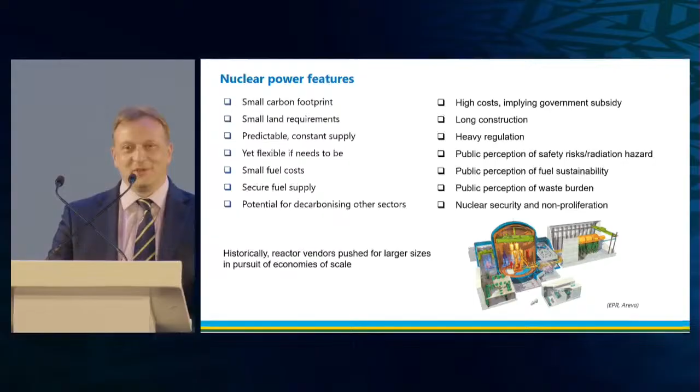However, everyone was waiting for the however, it does have challenges. So arguably the biggest challenge of nuclear power is costs, of course. So this is where small modular reactors are coming in. Long construction times as a corollary of this. Heavy regulations have been mentioned. Despite the actual small cost of fuel and waste management, the public thinks it's very dangerous and the fuel is limited and very hard to manage.

So traditionally, reactors were built to be larger and larger in pursuit of an economy of scale. So let's explore that concept a little bit. So what you see here is a marvel of engineering. This is a French/German design called EPR, which we're building in the UK at Hinkley Point C and hopefully soon at Sizewell.

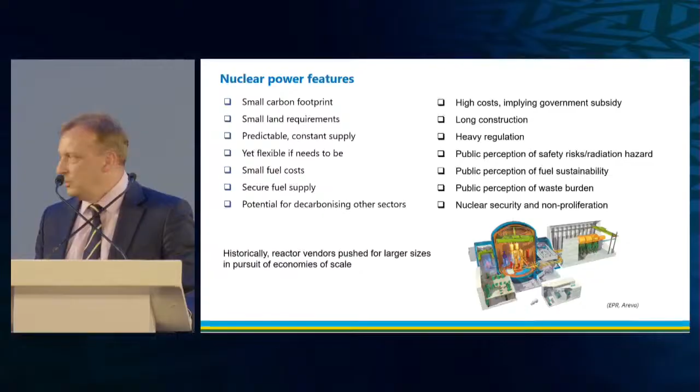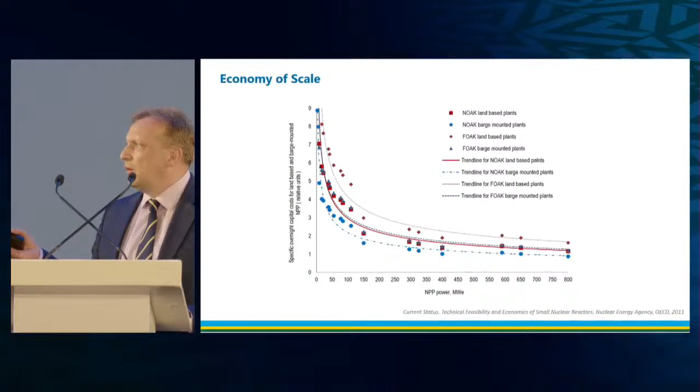Another thing I want you to note is that this curve is non-linear, so it kind of takes off at really small power sizes. So why would we contemplate smaller reactors and hope that they will be any cheaper? So let's explore that a little bit.

One of the things that have been talked about previously is a shocking realization that costs of nuclear, because they are mostly costs of capital, hugely depend on financing. So this is Hinkley Point C, but for other large reactors in the West you can have similar observations. So the green piece of the pie is the interest on your loan or servicing the debt for the construction, which tells you one of the most straightforward ways of reducing the cost of nuclear is to have more creative financing with or without government support.

Another observation which was also voiced is the fact that the cost of hardware, all the equipment and pipes and valves and pumps and heat exchangers, or the reactor pressure vessel and so forth, is relatively small. They're roughly a quarter of total costs. So where are those costs, and why do they vary so much across the world?

So two particular colors I want you to note here. One is productivity of labor in on-site construction, and another one is so-called indirect costs. Another way of saying this is bureaucracy or administrative burden: some people do the welding and concrete pouring, but 5 people are standing nearby and checking that this is done appropriately. Is this the most optimal way of doing this? I don't know. There are obviously other success stories.

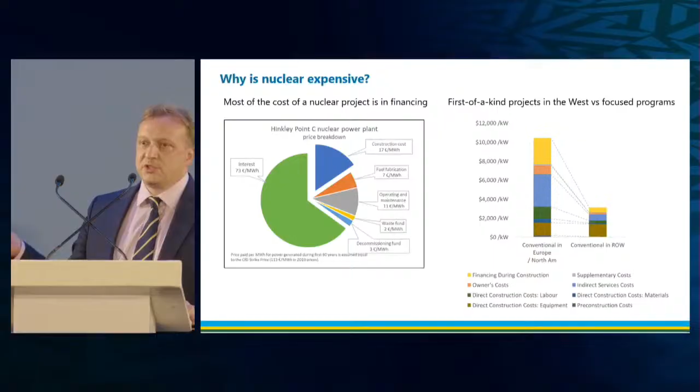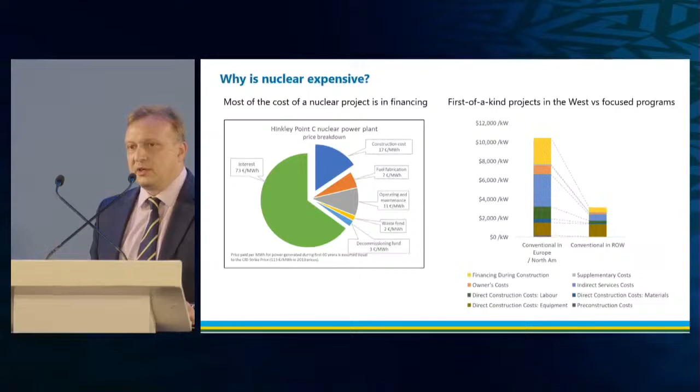What you see here is a comparison of nuclear costs in North America and Europe versus the rest of the world, with no cutting corners here. These are the same technologies being compared. So bureaucracy and cost of capital are the two obvious things to watch. And because you need to borrow so much money for so long, why don't we try to borrow less money for a smaller project that gives you returns sooner? So that makes your interest payments smaller.

So I thought the small modular reactors idea goes back to sort of the early 2000s. This is produced by Westinghouse in the US. This curve, again, the familiar economy of scale, but I dug a bit deeper and discovered this paper from the 1980s, published in the Journal of the British Nuclear Energy Society, which argues the exact same thing.

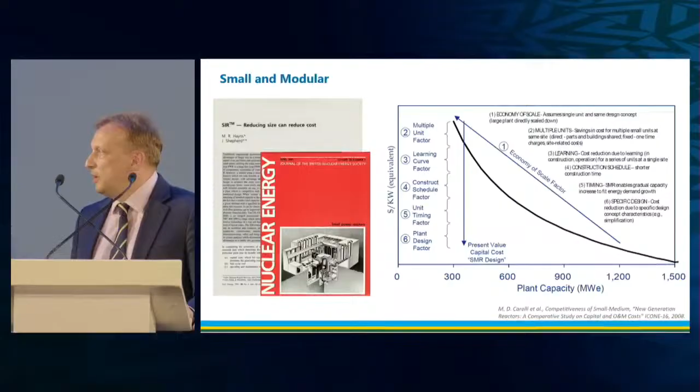So by going smaller, there's less money to borrow, there's higher certainty for project development, but also an opportunity to move expensive labor on site to cheaper labor in factories where you have better control, more opportunities for learning and more opportunities for standardization and quality control. So all these ideas have been around for a while, and now we, as the global nuclear industry, are trying to take advantage of those.

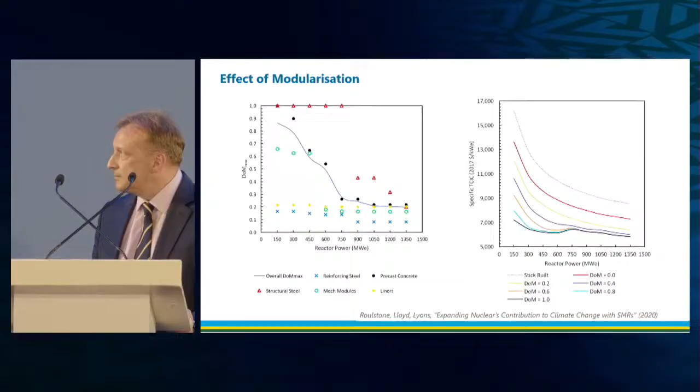So one of the key things in that pursuit is how modularizable the designs are. So the absolutely key thing is the so-called degree of modularization. The more of the power plant components you can move from the expensive site to the cheap factory, the better. And it turns out the smaller the size, the larger the degree of modularization that you can achieve. So as you can see here, the larger that degree, the lower the curve of economy of scale becomes, and at some point it becomes nearly flat. So your cost of nuclear construction becomes sort of insensitive to the size of the power plant.

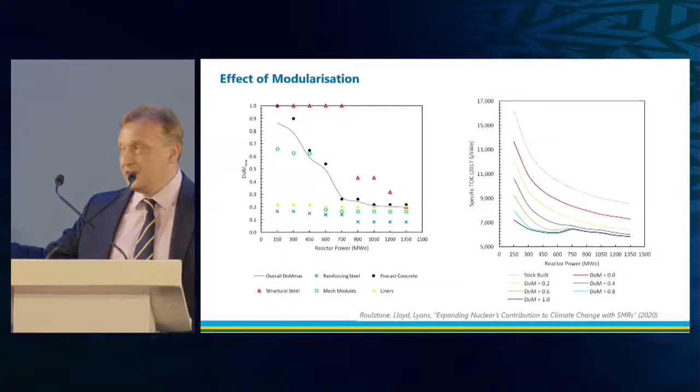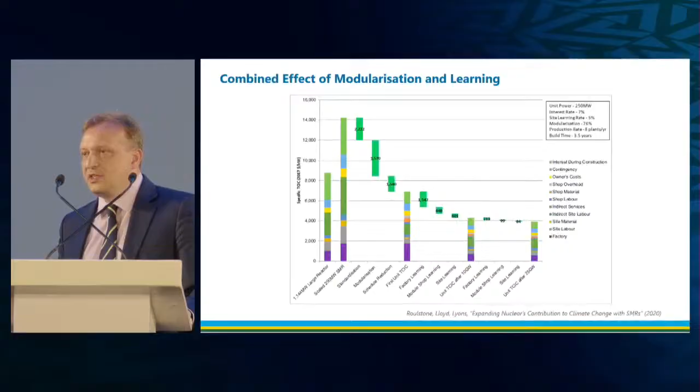However, exploiting these opportunities for modularization, learning, standardization, not just of manufacturing processes but also regulatory processes, as has been said before, you can reduce the cost to something that is actually even smaller than the large reactor, but inaccessible if you build something like an EPR, which is sort of the standard way of doing things, at least in the West.

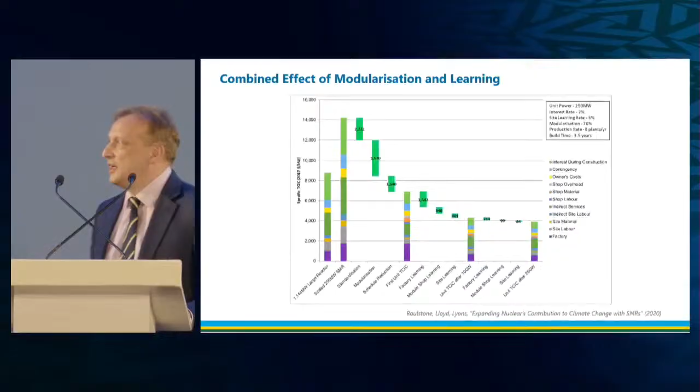So I want to leave you with a few key messages here. First of all, SMRs as an economic proposition are a very attractive concept, and I'm very excited about this, and I think we all should be.

Let's make a good example here in Africa pursuing this. So as I said, modularization is the key. It can be cost competitive with large light water reactors, but it will require a very highly optimized supply chain, which enables learning and economy of mass production to compensate for negative economy of scale.

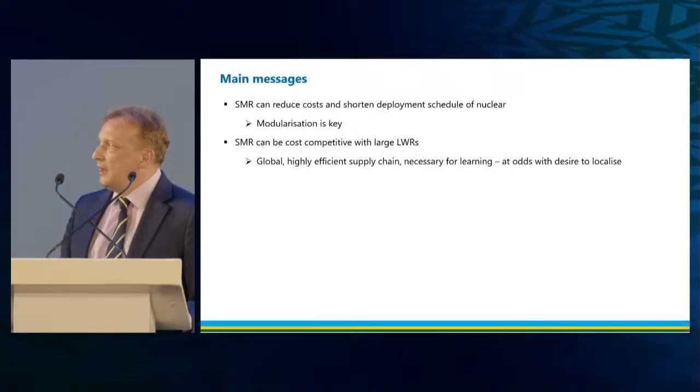So again, that was said in the previous panel or fireside chat, there's a slight tension here with the desire to bring jobs and localize as much of those construction or manufacturing activities locally. Where this sweet spot is, I don't know, but this is something for us to explore.

We talked about financing costs and necessity of deploying these power plants on a large scale. So for the learning to materialize, to manifest itself, it needs a reasonable volume of production. You cannot learn from two plants. It needs to be 20 or more to make the transition to factory manufacturing worthwhile.

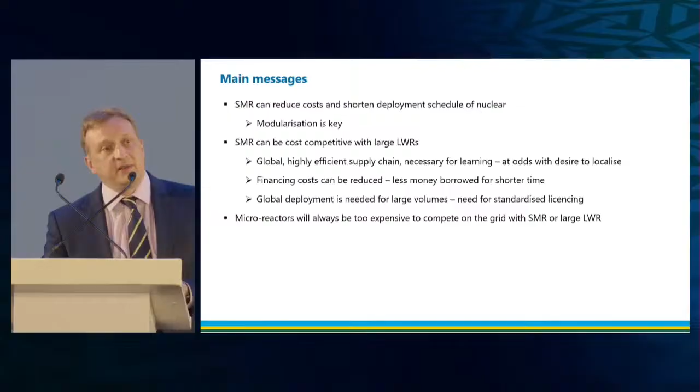A couple words about microreactors, and I'm finishing here. So these are at the very extreme of the economy of scale curve. So they will really struggle to compete with large reactors, but they don't have to. These are intended for off-grid operations, such as mining or islands or hard-to-get-to areas where the local construction can be absolutely minimized.

So from bringing the power plant on site to electricity flowing out, that time shrinks enormously, and you don't have all the expensive grid connection costs as well, so it can be economic. And it can also be decommissioned and taken away. So I do see a bright future for microreactors.

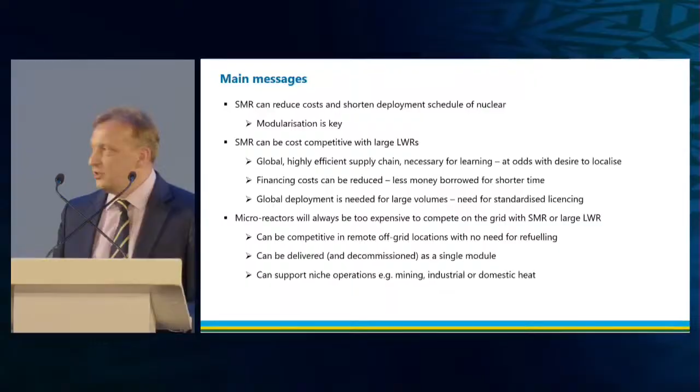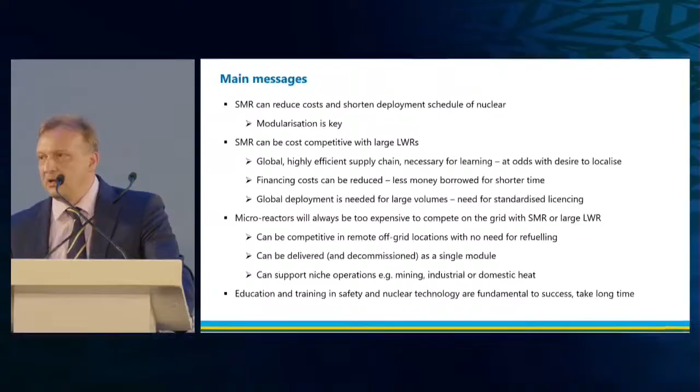Just finishing, I cannot emphasize more the importance of not just infrastructure, but human infrastructure. This is arguably the longest lead item in any project. So good people or competence being brought on a large scale, because, as we heard today, the demand for electricity is essentially unlimited in Africa. Whatever we as an industry can deliver will be happily taken, but it cannot happen without thinking about human infrastructure, and we at Cambridge are working towards that.

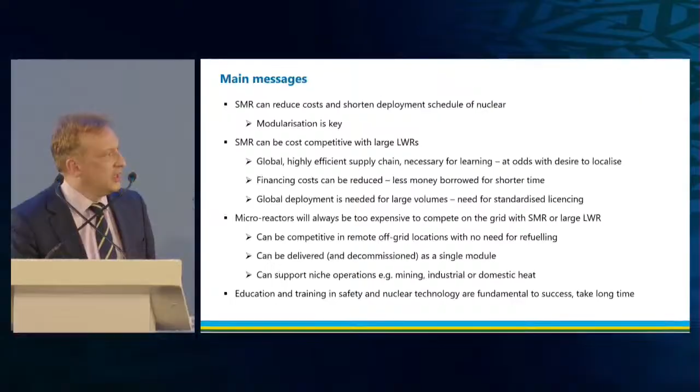So I hope this sets the stage. You know what to ask our panelists, and I'll turn it back to Ryan. Thank you very much, and apologies for the slight delay.

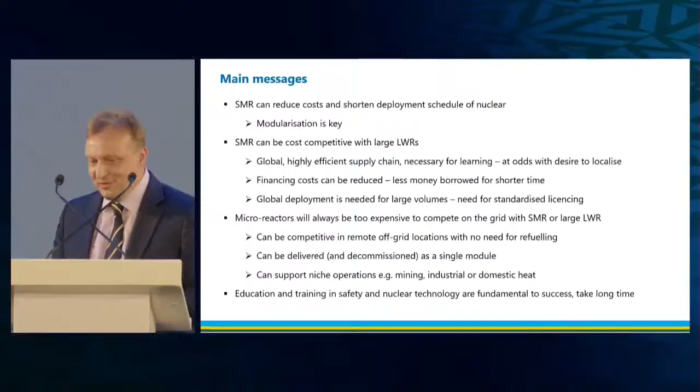Thank you, Professor. Hello, everyone. My name is Ryan Pickering, and I'm from Berkeley, California. I am not here representing the US Department of Energy. My current work is focused on working with students, communities, and stakeholders around the world to plan the development of new nuclear infrastructure and facilities for the benefit of all people.

As humanity rediscovers our love for nuclear energy, I want to thank our hosts from the Rwanda Atomic Energy Board for bringing us all together here in Kigali to explore the opportunity ahead of us. I also want to recognize the leadership of African nations in championing peaceful nuclear science and setting a powerful example of how this technology can serve human health, drive development, and unlock shared prosperity.

In this session, you'll hear from four of the world's leading small modular reactor developers. Each will have seven minutes to pitch the technology they're bringing into the world. And after that, I will pester them with some questions to keep things lively. So let's get started. Please join me in

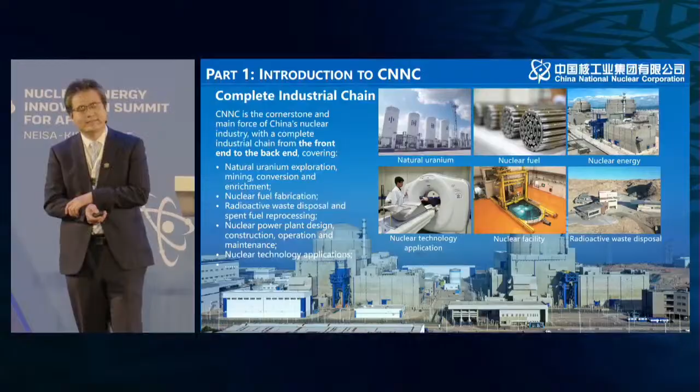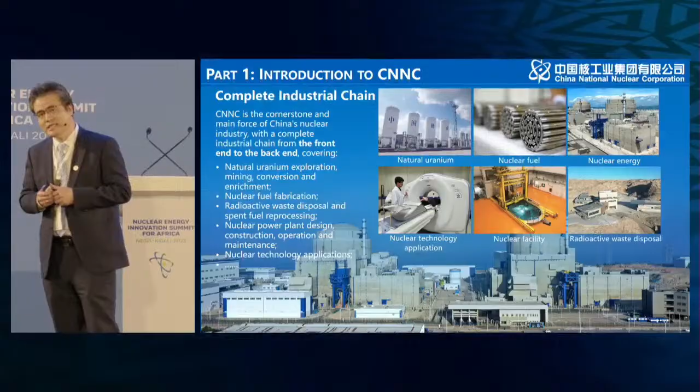CNNC was founded in 1955, originally as the Ministry of the China Nuclear Sector. With seven decades of development, CNNC has grown into a global leader with total assets of $200 billion and is listed among the Fortune Global 500. The core strength of CNNC relies on its fully integrated industrial chain, from uranium exploration and fuel fabrication to nuclear power plants, as well as decommissioning and radioactive waste.

In addition to supporting China's domestic nuclear growth, CNNC's international division, which we call CNNC Overseas, has been providing global solutions for over four decades. And currently, CNNC Overseas is actively engaging with more than 10 African countries on their nuclear goals.

Let's go through the journey of the China nuclear industry. It began with scientific research in the 1950s, advanced with the concurrent deployment of our indigenous technology and foreign technology, and accelerated with successful localization and independent innovation. And especially, we achieved major breakthroughs on Generation 3 technology, Generation 4, as well as small modular reactors and fusion reactors.

At the early stage, China's nuclear program also faced a lot of challenges, such as a fragmented roadmap and dispersed resources. And in 1983, our government decided to unify our national nuclear strategy. We call it the three-phase roadmap. Guided by this roadmap, China has successfully developed a full-spectrum technology portfolio, from thermal reactors and fast neutron reactors to fusion reactors.

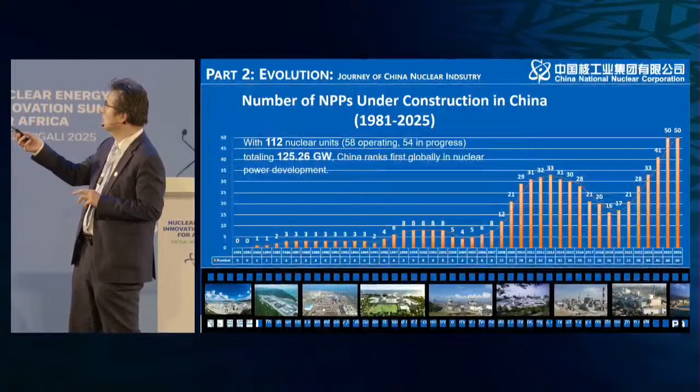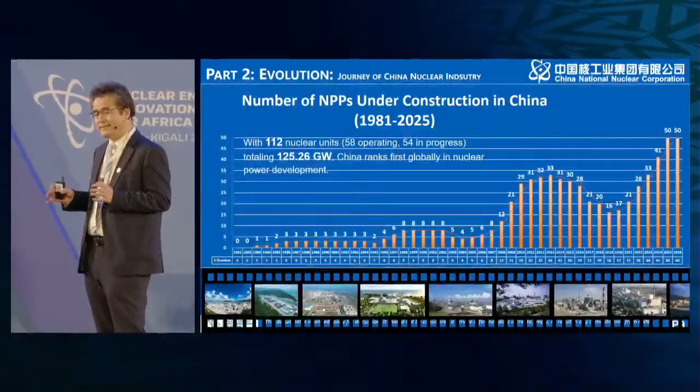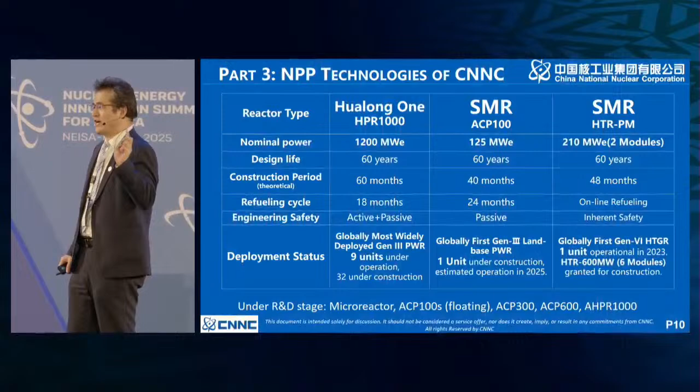Currently, we are operating 58 reactors, and we are building 54 reactors with a total capacity of 125 gigawatts, making China rank first in the world. Let's explore our core technologies: one large reactor and 2 small modular reactors. Besides that, CNNC is conducting research and development activities on other kinds of technologies, such as micro reactors and floating reactors.

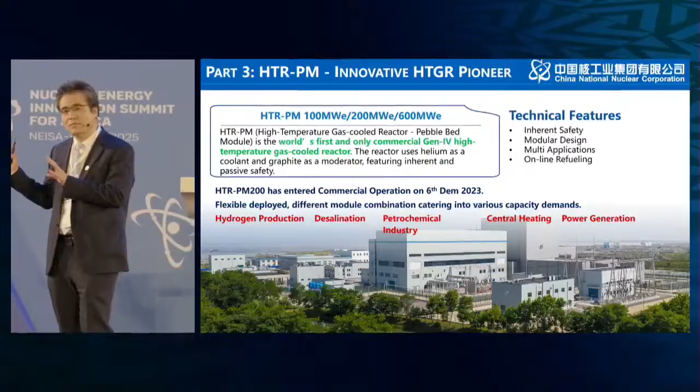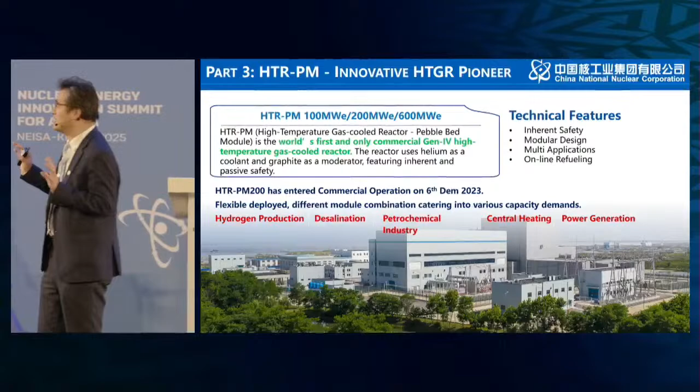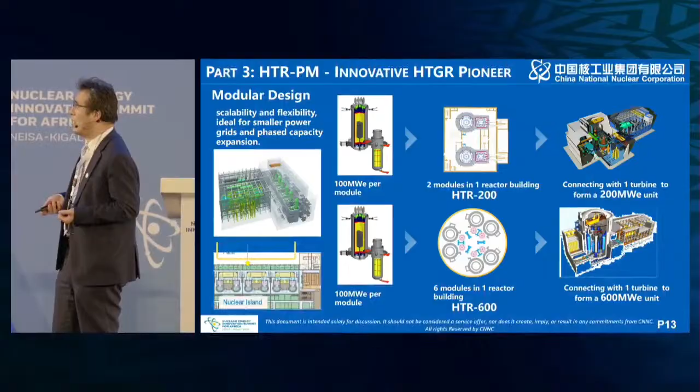The HTR-PM is our first small modular reactor. It is the global first and only commercial Generation 4 high temperature gas-cooled reactor. This reactor uses helium as the coolant and graphite as the moderator to achieve inherent safety. This reactor also adopts the modular design to make its deployment more scalable and flexible and much more adaptable to the power grid.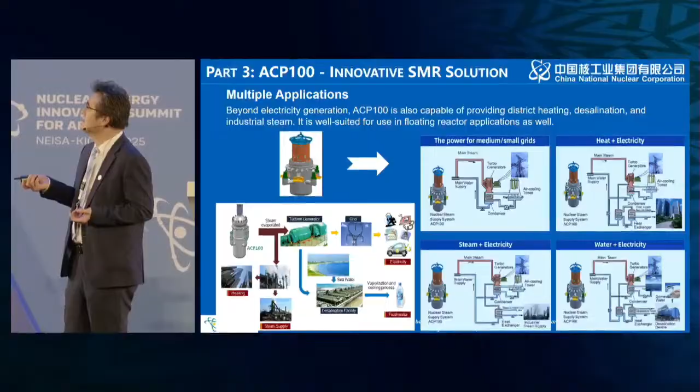Let's look at the second SMR, ACP100. It is also the global first commercial land-based SMR, currently under construction, and it is expected to begin commercial operation next year. For international cooperation, CNNC and the IAEA signed the world's first capacity building implementation agreement for SMRs last year, and this April we jointly launched the generic user requirements for SMRs to offer a standard solution for emerging countries.

To support this effort, CNNC has developed a comprehensive training system covering the full life cycle, from siting to operation and outage, to support the safe, efficient and localized deployment of SMRs worldwide. From the above, we can see clearly that innovation is the core driving force for nuclear power development in China. So let us unlock the secret of successful innovation. It rests on the synergy among industry, academia, and research institutes.

We also emphasize the unity of knowledge and action. It means that we should try our best to turn our ideas into reality and deliver the solutions. So the success is powered by our stable strategy, collaborative innovation and industrial scalability. For Africa, today we also focus on how to deploy nuclear energy in Africa. Here, I would like to propose.

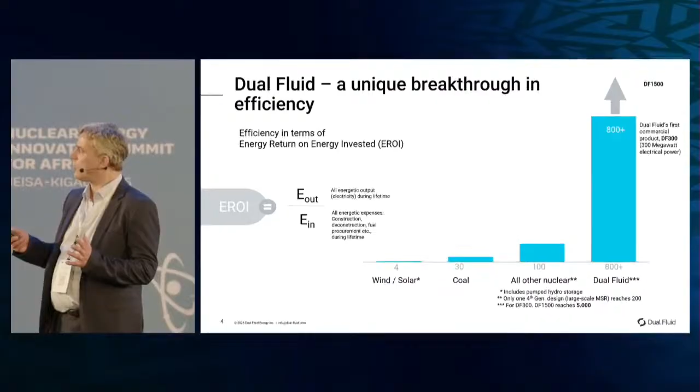So here is a more detailed explanation of where it comes from. It comes from efficiency. All that matters is efficiency, in terms of energy return on energy invested, which means the ratio of all energetic output of a power plant during its lifetime compared with the energy input during its lifetime, including construction, deconstruction, fuel procurement, everything. So it's a life cycle analysis.

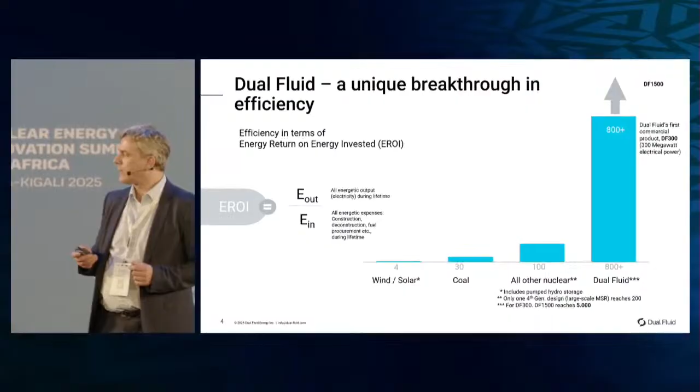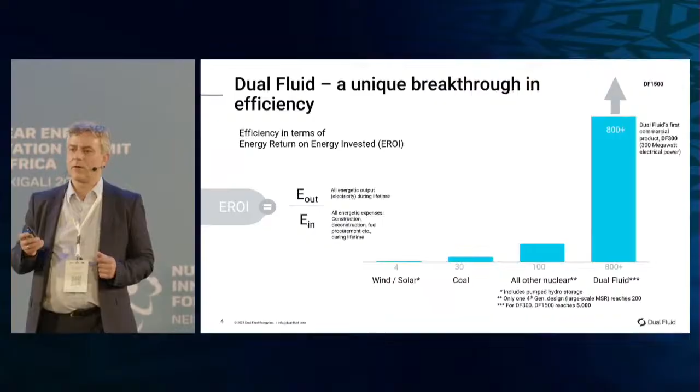If you compare the different technologies, wind and solar, coal, you see they are all small, but coal is what modern industries are running on right now. So a factor of 30 is the comparison number. And you see that nuclear today is already higher, so it is better than coal, but not good enough. And Dual Fluid, our new reactor type, could go up to 800 and, with bigger power plants, the DF-1500, up to an EROI, or efficiency, of 5,000, which means you obtain 5,000 times the energy you invested. So this would be a boost for the economy.

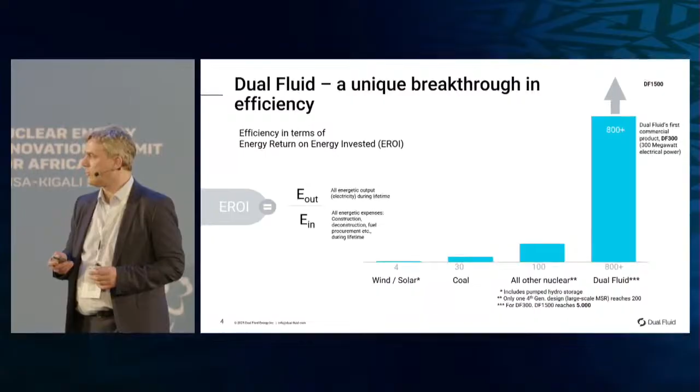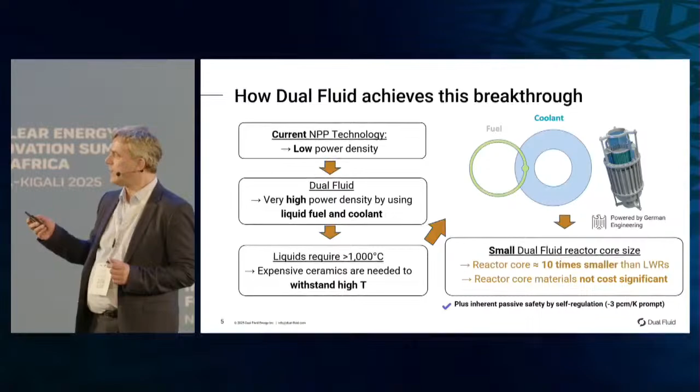So how can Dual Fluid achieve this breakthrough? Well, it's a simple principle, and it's patented in all nuclear generating countries. We have a fuel loop and we have a cooling loop, and both are intermingled in the reactor core. So everything is liquid fuel, liquid coolant, but the functions are separated, which is contrary to the molten salt reactor concept. So German engineers are working on this concept.

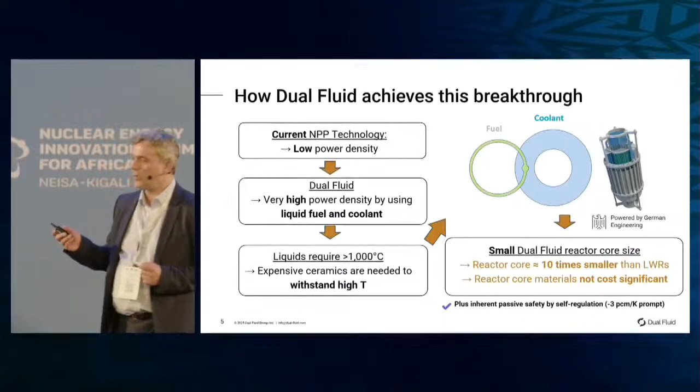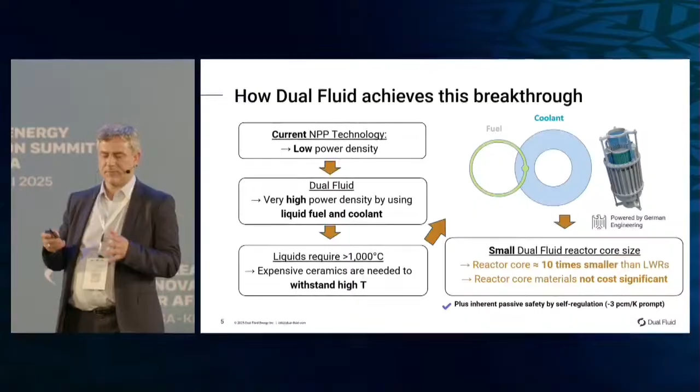The problem of today's reactors is a low power density. And with this dual fluid principle, we can achieve a higher power density, but the problem is that liquids require a higher temperature. And for Dual Fluid, it is not a problem because the reactor size shrinks by a factor of 10 in the volume. And this means you need 10 times less structural materials.

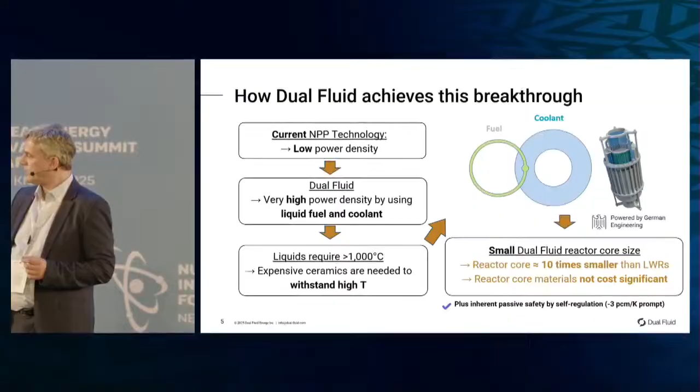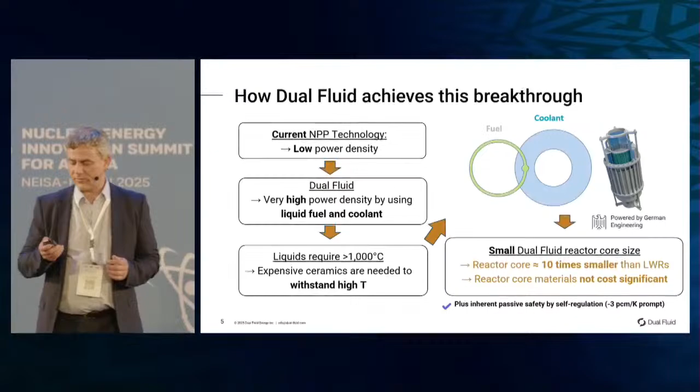And this means you can easily achieve things that are known in the normal industry, but not so well known in the nuclear industry. And this created the most efficient reactor ever. And you have an inherent passive safety by self-regulation, because liquids react very strongly to temperature changes.

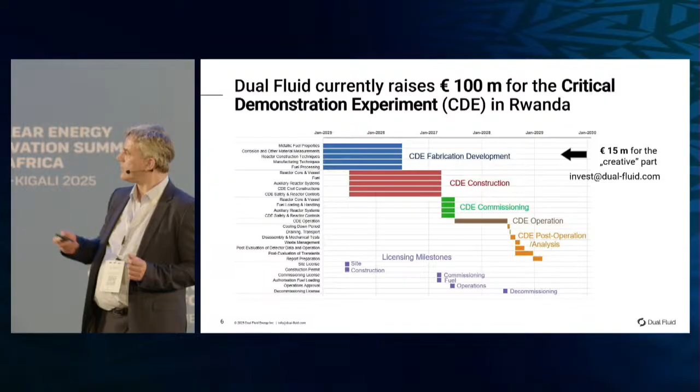So it's a demonstration experiment, lasts for 4 years, starting now when the investment comes, and in the middle the reactor becomes critical. But the creative part is the first part, the blue one, the CDE fabrication development, which requires only 15 million. And we are currently acquiring investments for this.

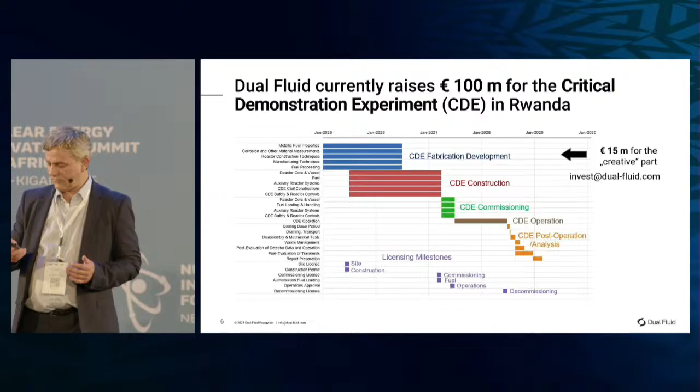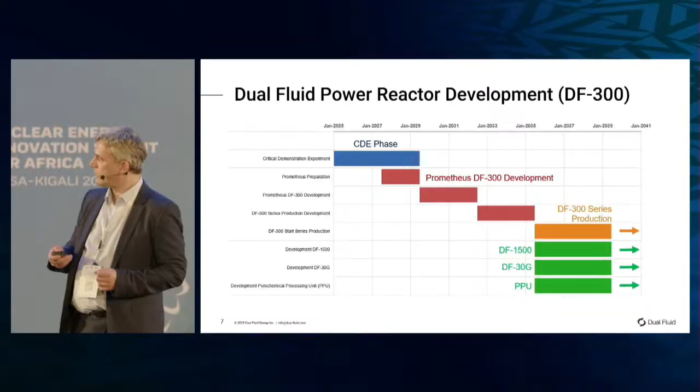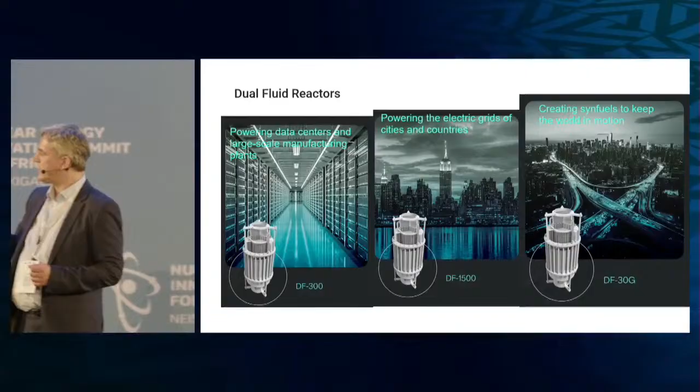Here is the overall long-term plan. So after the CDE phase comes the so-called Prometheus DF300 development for the first power reactor, the DF300 with 300 megawatt. And bigger models are coming afterwards. Here's an overview of the models we plan: the DF300, the DF1500 with 1,500 megawatt electrical power, and the DF30G with 30 gigawatt thermal power. So these are the models we plan to develop.

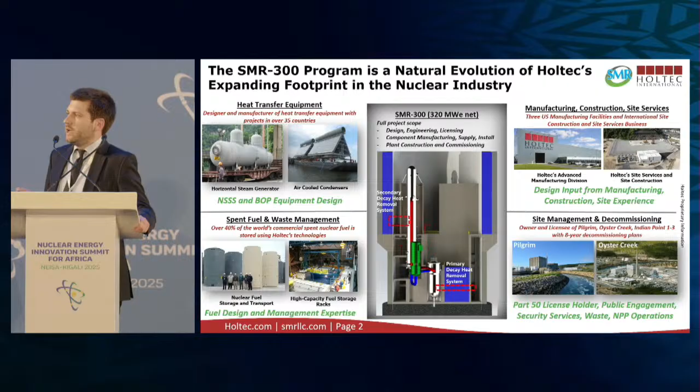in Africa. And we also own 4 nuclear sites in the US, including the site of Palisades, where we will be restarting the large-scale 800 megawatt reactor by the end of this year, and that will be the place for the first of a kind of our SMR 300 dual unit to be commissioned by 2030. All of this will serve the deployment of the SMR 300 on a turnkey basis. So this is a real project that will be built in Palisades for the first of a kind.

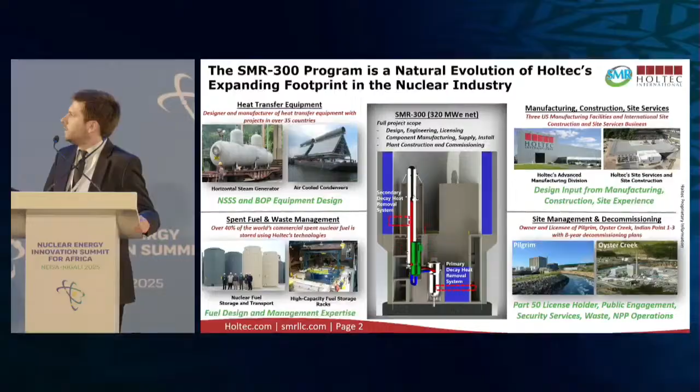So if we go more into the details about the technology, this is a light water pressurized reactor. 1,050 megawatts thermal, 320 megawatts electric net to the grid for a single unit. But our standard configuration will be the dual unit. It is designed for a lifetime of 80 years. It is a low-risk technology and a mature technology.

So if we go through the key advantages of the SMR 300: Holtec and its partners, with the support of the DOE, the US Department of Energy, have invested more than $500 million for more than 10 years. It relies exclusively on proven technology, on light water pressurized technology with more than 40 or 50 years of experience. This is a walk-away safe reactor and Fukushima-proof because it only has a fully passive safety system. It only relies on natural phenomena like gravity or natural convection. It is economical as well because it has the highest power density of any of the light water pressurized SMRs currently in the market, at least for generation 3+.

It is simplified because obviously for us, the S of SMR is not only small, but it is also simple. We have dramatically decreased the number of safety features. Think about 80 safety features for a large-scale reactor. In the SMR 300, it will be only 7, fully passive.

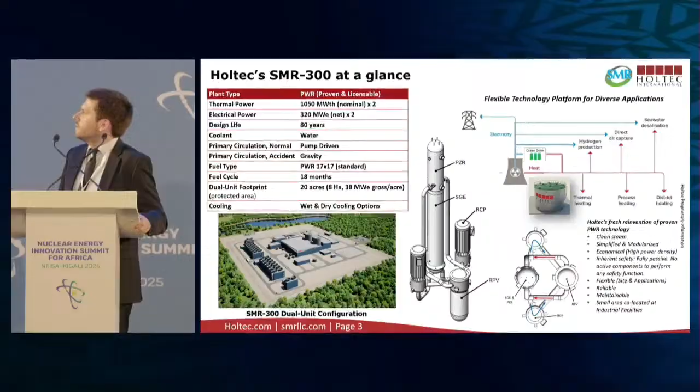So Holtec has built a proven delivery team for its SMR 300. Obviously, we are providing the technology. We're also manufacturing the big components like the pressure vessel or the steam generator in our advanced manufacturing facility in the US, which is a dedicated plant for manufacturing the components of the SMR 300.

We have partnered with Hyundai, which leverages more than 50 years of uninterrupted experience in construction of nuclear power plants, the last big success being, of course, the Barakah power plant in the Emirates. We have also partnered with Mitsubishi to deliver the MELTAC control system with the I&C, which is licensed in the US and in use in Japan and in China.

We have also partnered with Framatome for the first 2 cores of the reactor, which is a standard 17 by 17 fuel assembly. And also, as a commitment to local development, we will partner with local partners.

About our licensing, we have been in a large ongoing regulatory process with the US NRC for some years, with topical reports, white papers, hundreds of pre-engagement meetings. We have incorporated the regulatory feedback during this process. So what you have to think is that this is a low-risk technology.

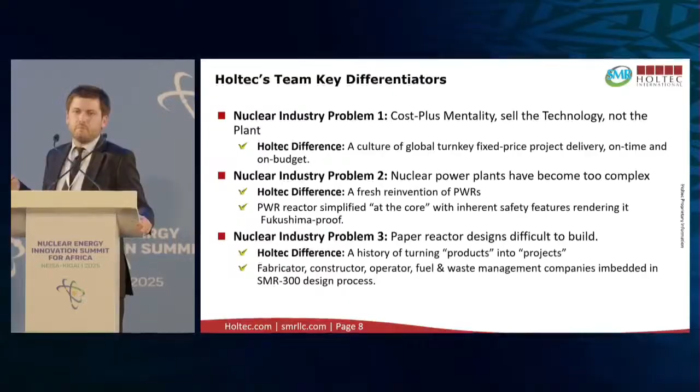Thank you so much. I saw the word local a lot in your presentation for a US-based international company. It's very welcome to see. How do you see localizing the opportunities and benefits of nuclear here in Africa with Holtec's solution?

Well, I didn't have time to mention it, but in Palisades, for example, we have leveraged the restart of the large-scale reactor to assemble a dedicated workforce and leverage local workforce. It will create more than 1,000 jobs at the Palisades site. So this is really important when you go into the market.

You have to incorporate training. We are developing simulators. We are dedicated to training operators through this simulator, and that's what we are doing in Palisades, and also for the SMR 300, which will be the first of a kind in Palisades. So we could do the same in Africa.

Also, of course, we are committed to expanding our manufacturing capability depending on the market demand. We have a strategy of regional hubs, we could say, to replicate the advanced manufacturing division facility that we have in the US, in Europe first, probably, and beyond.

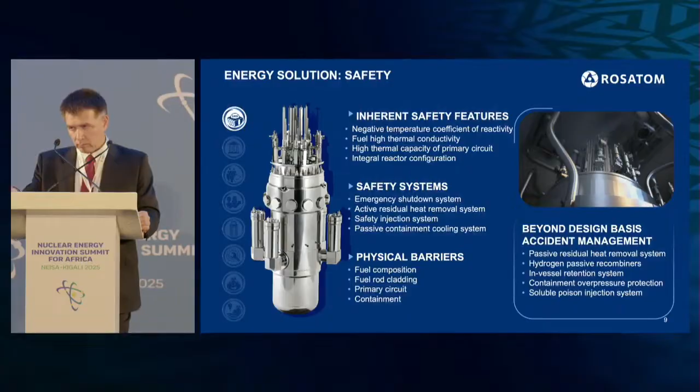Our first-of-a-kind SMR NPP with the RITM reactor in Russia is going to launch in the Yakutia region. Beyond Russia, we've signed our first export contract with Uzbekistan for a 110 megawatt SMR NPP, 2 reactors, demonstrating global confidence in our technology. Starting from nuclear infrastructure, that covers the full set of services and solutions needed to ensure efficient, responsible governance and regulation for sustainable national nuclear power program development. During all years of project development, Rosatom assists in raising public acceptance of nuclear power and awareness of all its benefits. We strongly believe that transparency and openness to all stakeholders is the main tool.